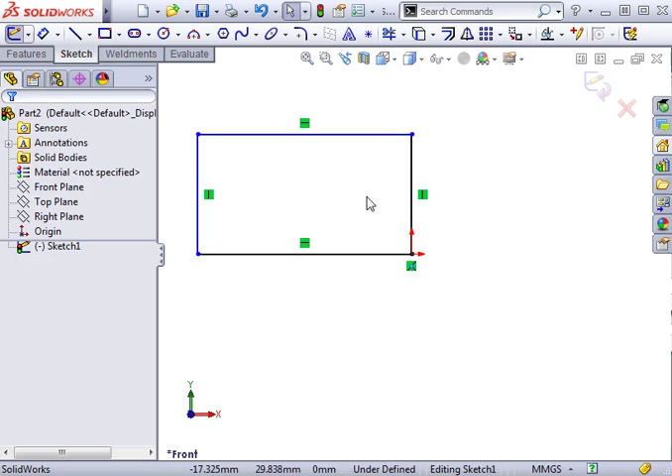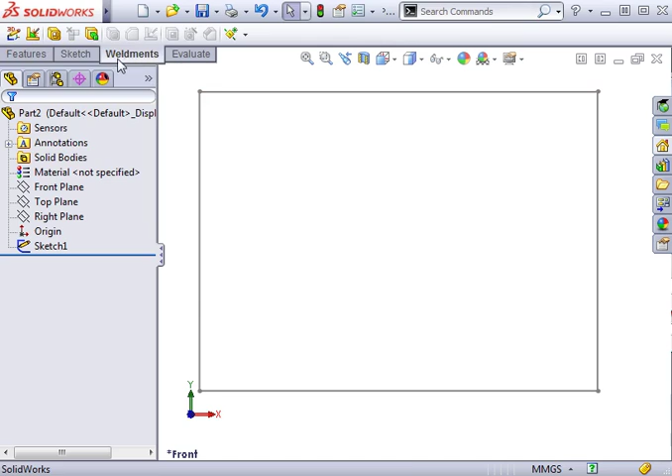Next, I'll click on the Weldments tab in the Command Manager to reveal the weldment tools. What I'll do here is add the first structural member to this weldment. To do this, I'll click the structural member icon revealing the Structural Member Property Manager. The first few settings allow you to define the characteristics of the structural member. I'll select ISO as the standard and rectangular tube as the type. The size will be 50 by 30 by 2.6.

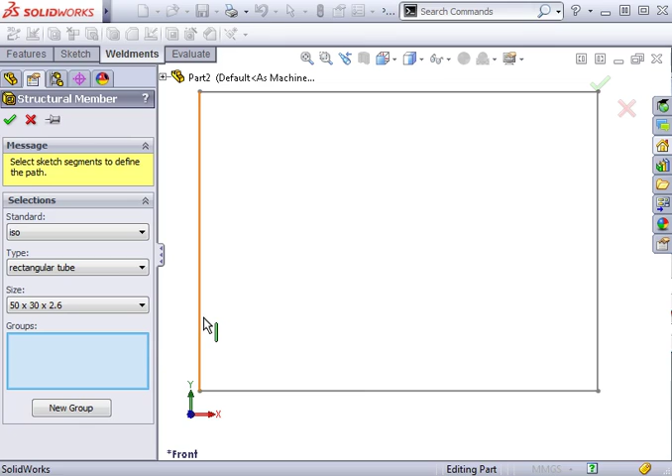Now that the structural member is defined, all we have to do is tell SOLIDWORKS where to position it. This is why we created the sketch. As I click each segment, SOLIDWORKS will create a structural member following the direction and length of each segment. You'll notice in the Group selection window, one group is listed. In the Settings section, you'll see the segments I've selected in the Path Segment selection box, followed by a number of settings including corner treatment, gap distance, and profile alignment. These settings will only apply to the path segments of the group that's highlighted.

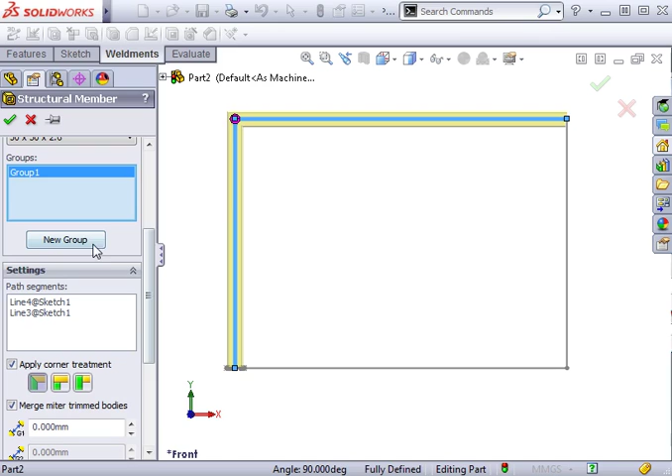If I press the New Group button, a new group is added and I can select the remaining segments. The settings for these segments will not affect the path segments of Group 1. If I wish to edit Group 1's path segments, simply highlight Group 1 and its path segments are listed. One last thing about groups, notice what happens when I change the size of the tube. All of the tubes update. That's because any of these settings above the Group selection box will be applied to every group. For this example, I'm going to delete Group 2 and add all of the path segments to Group 1.

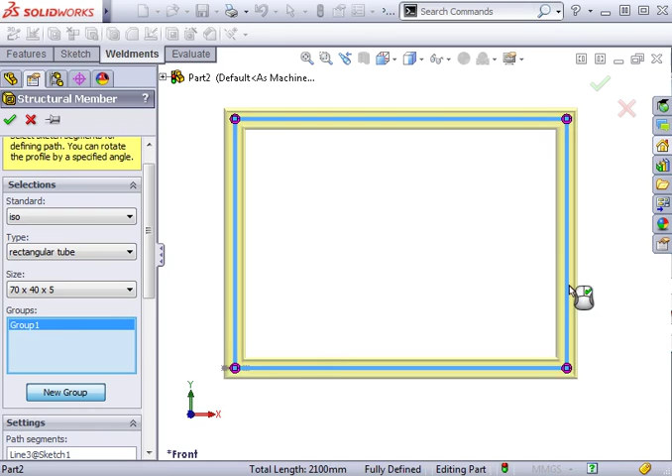You can control each segment's end condition by enabling the Corner Treatment checkbox. Notice that if corner treatment isn't used at all, each structural member will extend the full length of each sketch segment. This leads to overlapping geometry. To avoid this, I'll enable corner treatment. You can see the different corner options as I click each of these icons. By using the icons, each corner will have the same corner treatment applied.

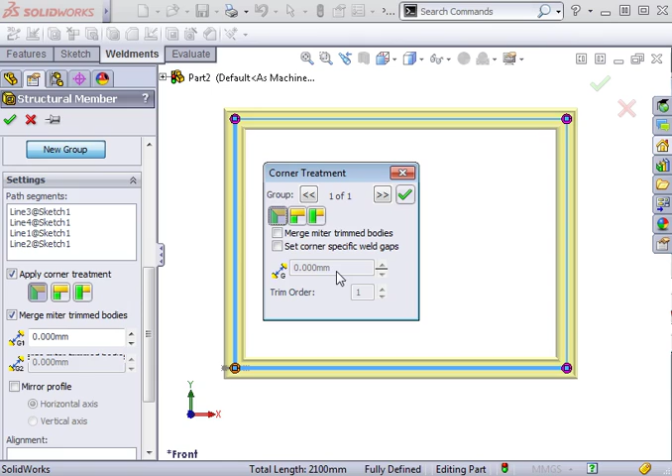If you wish to control the behavior of each corner individually, all you have to do is click the corner point that you wish to change. This will bring up the corner treatment options. Here I have the ability to set the corner treatment and set a weld gap distance for the corner. Once you select an option and click OK, the treatment is only applied to this specific corner.

To set the weld gap distance for all of the members, I can use this box here. This first spin box lets me set the gap distance between members of the same group, and the second box sets the gap distance between members of different groups. Because I only have one group, this box is grayed out at the moment.

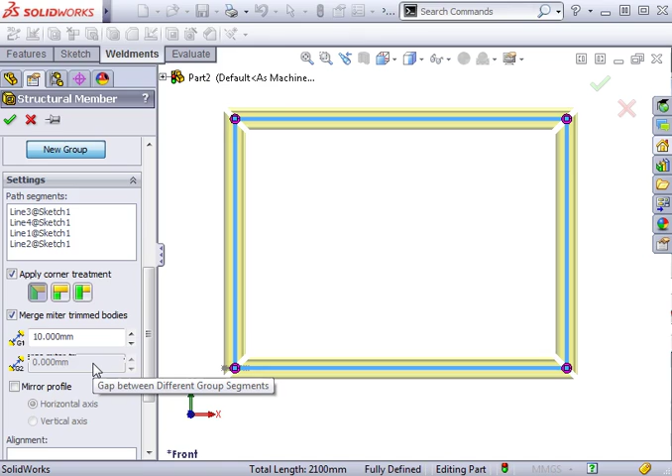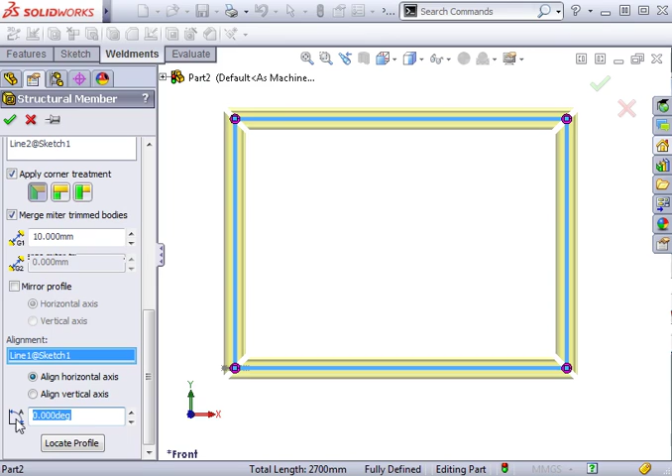The last setting you can control is the position of the structural member profile. With the Alignment selection box, I can select a line segment and choose to align it with the horizontal axis or the vertical axis. By entering an angle, you can cause the profile to rotate, for instance to 45 degrees. I'll change this back to 0 degrees

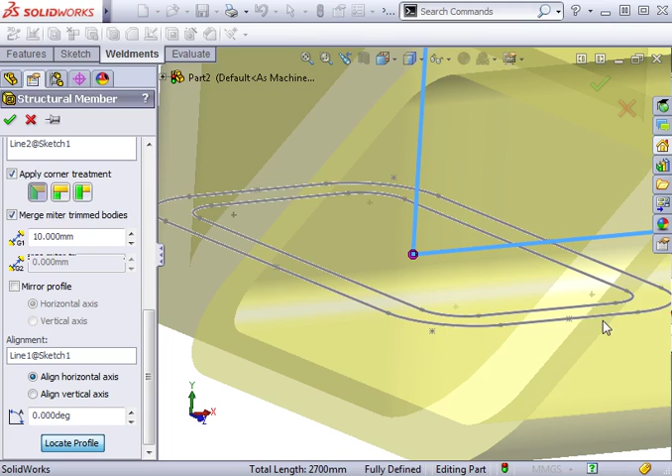and click the Locate Profile button in the Property Manager. This allows me to change how the profile is positioned in relation to the sketch segment. To move the profile, I'll simply click any other point on the profile sketch. The profile will move and the preview of the structural member will update. I can also use the Mirror Profile checkbox and select to mirror the profile about the horizontal and vertical axis.

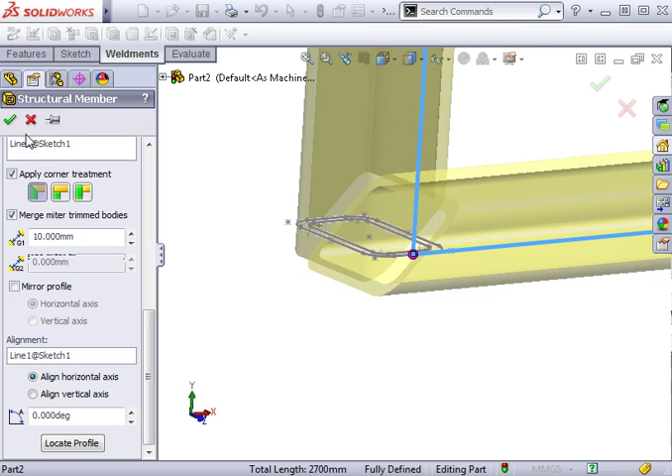Once you're satisfied with the settings you've defined, click OK to complete the structural member feature. After the first weldment is created, two new items are created in the Feature Manager tree. You'll see a feature called Cut List and another called Weldment. We'll take a look at the role of each of these features in the next few lessons.